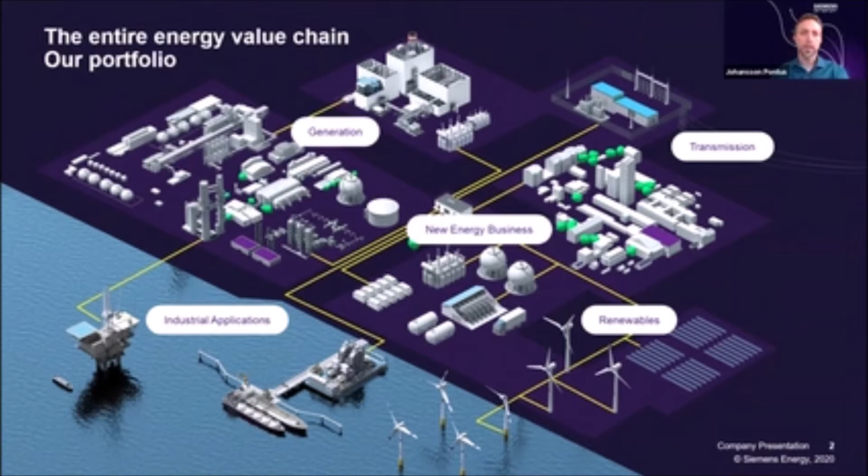Within this company, Siemens Energy, I'm a senior key expert on additive manufacturing, and have a background in industrial engineering and operations management. I worked across a few different countries through the last 25 years in industry, and got into AM back in 2014 when I got the amazing challenge and task to design and build our first additive manufacturing workshop here in Finspång in Sweden for Siemens at the time. That was amazing - it's of course still running, one of the backbones of our additive journey currently.

My role now is to see how we industrialize this technology and make it work in a larger context, with more components, more types of technologies, and to see how this technology is impacting our value chain and our manufacturing setup with all it entails. Hopefully I'll get into some of those details as we progress here.

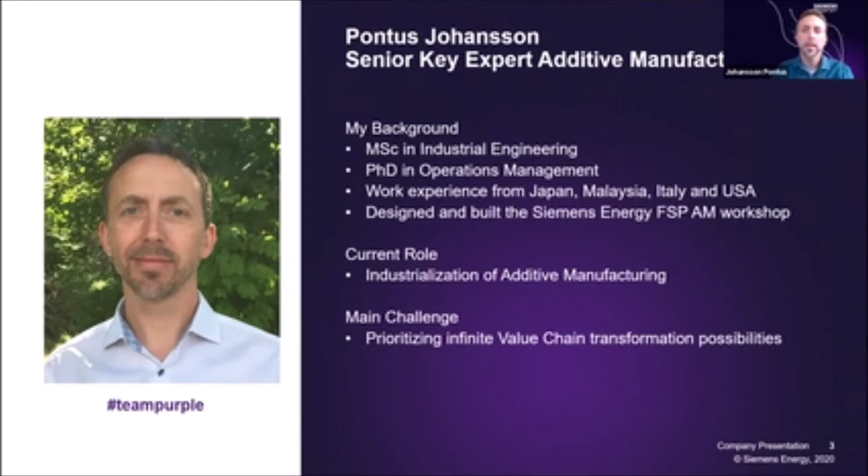Looking at a jet engine, it's a very complex, high-tech product, and so are our gas turbines. Additive manufacturing gives us a possibility to improve the combustion system, the turbine where you actually generate the power, the compressor where you set up the air pressure to be combustible. All of these are highly complex geometries in very advanced materials, where we see additive technology as being a key driver to making these components better.

Better for us means they will live longer, so be more sustainable. They could have higher efficiency, so they would provide a better value proposition to our customers. Or it's just a general life cycle improvement in how these products live their life cycle.

When we talk life cycle, it's not an Apple iPhone or other brand phone with a few years of life cycle. These are intended to work for 15, 25, up to 50 years, preferably without too much interruption in operation. Meaning we have components the size of a fist weighing about 1 kilogram that each generate the same power as a Formula One engine at full throttle. And that little component has to continuously operate 24 hours per day for 4 years, without failure. So it is high-tech stuff we're working on, and where we are applying additive technologies to make these components better.

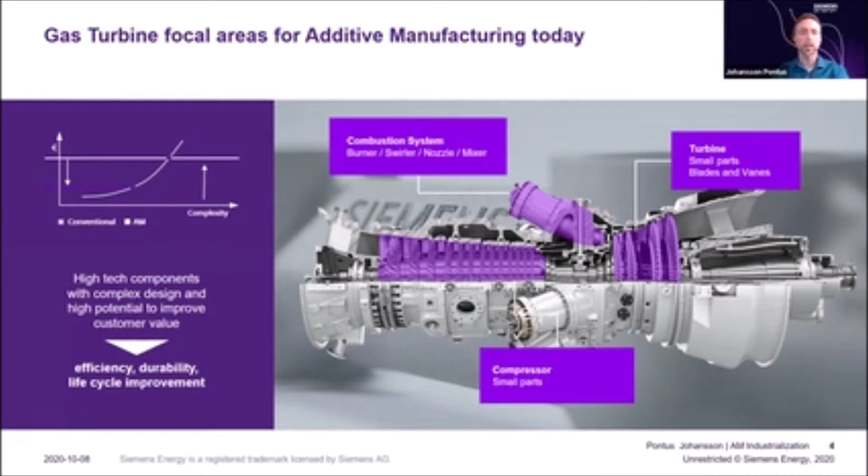That's almost it. In this turbine, combustion of fuel is critical. I think what we see on the screen is actually an example of where additive manufacturing is a key game changer for us.

In energy, conventionally, you can hear about - we as the human race, we burn coal, we burn oil, we burn natural gas. In my basement, I could burn wood I chop myself from my backyard. But basically, to generate energy that can be used as electricity, a lot of it is based off combustion.

What we are now capable of doing with additive technology is create combustion systems that burn hydrogen, meaning there are solutions in place for a carbon dioxide free emission solution in energy. Additive technology isn't the only solution, of course, to creating hydrogen as a fuel. We need electrolysis, solar energy, or wind energy to create hydrogen. But having hydrogen means we can store a carbon dioxide free fuel and use it to create electric energy when we actually need it. So for us this is one of the game changers, and one of the things we're very proud of.

We have a company in Brazil that has procured a turbine setup from us, initially set up to run on 60% hydrogen, meaning a huge cut in carbon dioxide emissions. This for us is a core part of the future energy solution for the world. It's not something that's going to happen overnight, absolutely not. But that type of fuel changeover, based off additive technologies among other things, is to us a core future technology direction.

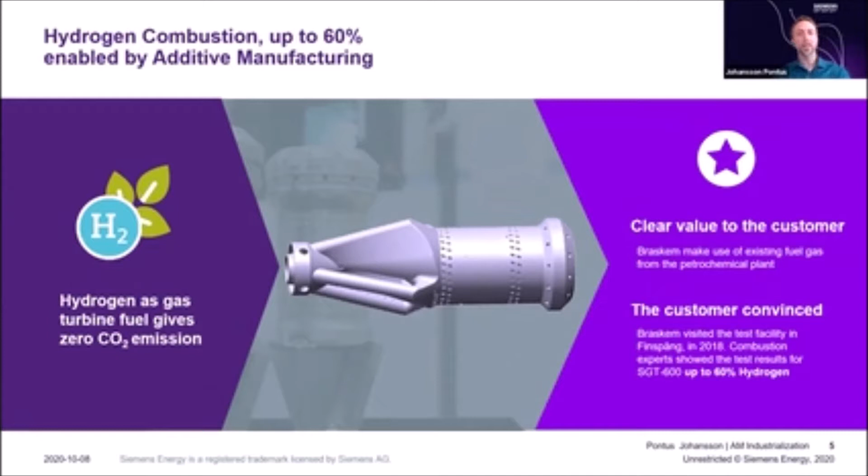This is really a leading star in that journey. To get there, having been able to make that hydrogen combustion solution and getting the first component out there for customer use, it's not something that happened overnight.

Going forward, in 2016 we inaugurated our first really industrial workshop, built here in Finspång, Sweden.

We've been working with additive technologies for a long time and on a broad range. So in 2017, Siemens decided to invest in Markforged, which is, I guess, one of the reasons I'm here today, Mick. Having seen the potential of the company and the technology, we figured this is something where we want to see more. A year ago, we set up a print hub here in Finspång as well.

This print hub was based not just on metal parts, because there's a difference, right? In our end components, we use metal. Back in '17, Markforged was focused on composites, which of course you can't put in a gas turbine because it would melt or burn away very quickly. But still, there's value for us as a user of additive technologies to understand the range of applications and technologies.

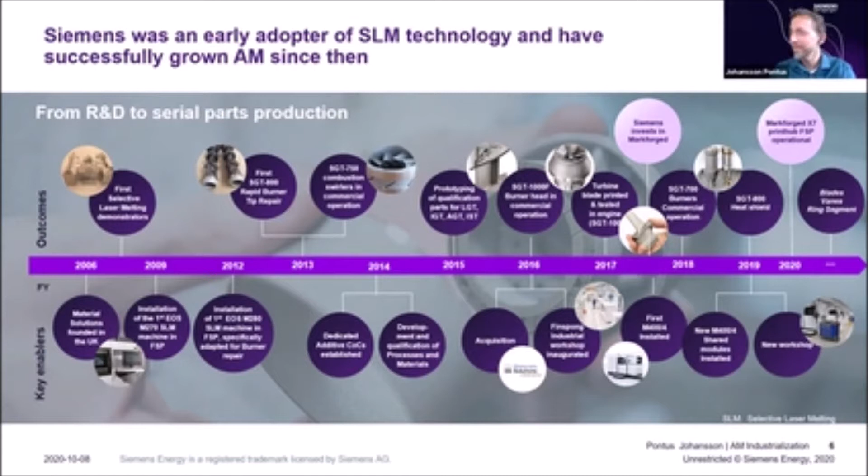With AM, what we see is at minimum two directions that things are changing for us. One is on our products, right? Our products are changing. And I showed you that hydrogen burner before, the combustion system for hydrogen. It just means that we can do something completely different on our products, and we can change weight and materials.

We could scan an existing part that we made and recreate old spare parts. We could change the performance of our components. So the look and performance of our parts will be different. So that's one side - that's the CAD side of things, right?

What can you design? The other is the manufacturing itself. What does additive mean in terms of the changes to our value chain? When you suddenly have a much different possibility around making castings, toolings, fixtures, the speed is different, the pace gets different. You can do very advanced components in very low volumes, for example, with additive technologies, which might be almost impossible if you look at doing an investment casting solution, where you just can't pay for that on a low volume part. So we see two different directions of how the technology is changing us.

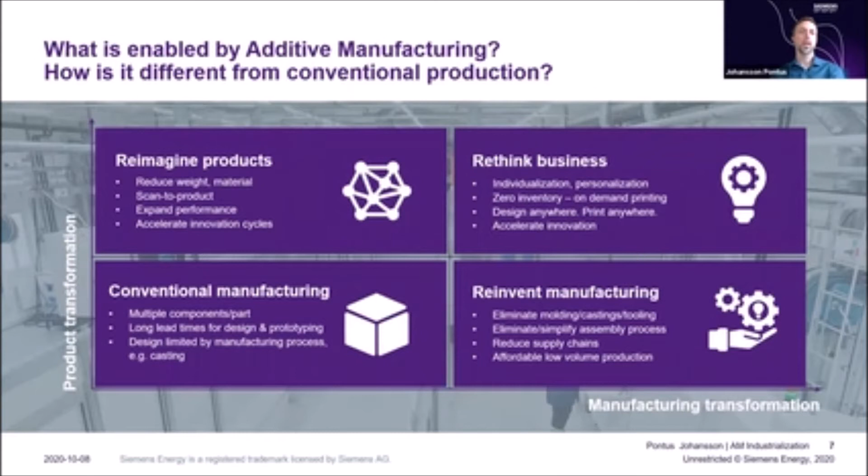It might be familiar to a lot of you guys online and gals. And these parts are here shown being assembled with a bolt through each of them, or a screw actually, into a gearbox. So this gearbox is used to change the rotational speed of approximately 25 megawatts of power.

And we had a customer in South America who needed to have that gearbox realigned. And this little black plastic tools, as they are, they were missing. They are originally a cast iron tool, so heavy chunks of metal that are used to align the shaft of this gearbox to get it up and running again.

And we had an overhaul of this customer site happening in about a week's time. And these tools, which were customer owned, were missing. There were no tools. We had a similar set, but not the right set in our factories here, but we couldn't ship them because we needed them in our factory. And it's just a question, how do we then make this?

So it ended up with us re-engineering a tool that we thought would work. And these Onyx parts we see here are among the most expensive parts we've done, because to make them substitutable to a cast iron part, there's a substantial amount of carbon fiber in these bodies.

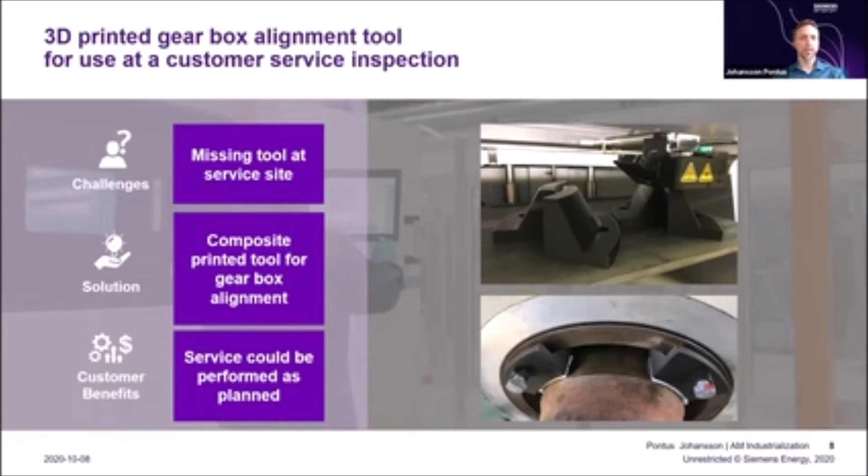Okay, on time, I'm probably about to not fulfill this on target. Again then, just very briefly, right?

I showed you the picture of the hydrogen burner. We used the same picture. Of course, it's not an identical part, but printing this burner, because we have a similar one today made conventionally, just to show what additive does.

When we make this conventionally, basically we weld together 13 metal pieces through 18 different weld operations. We put a thermal barrier coating on top of it, and it has a 26-week lead time to make this part. When you substitute that with a printed version, it's one integrated metal part.

So it's just one article number to keep track of, for example, in your ERP system. It's better from the perspective that it's better cooled. You don't need a thermal barrier coating, and it takes about 3 weeks to make this part.

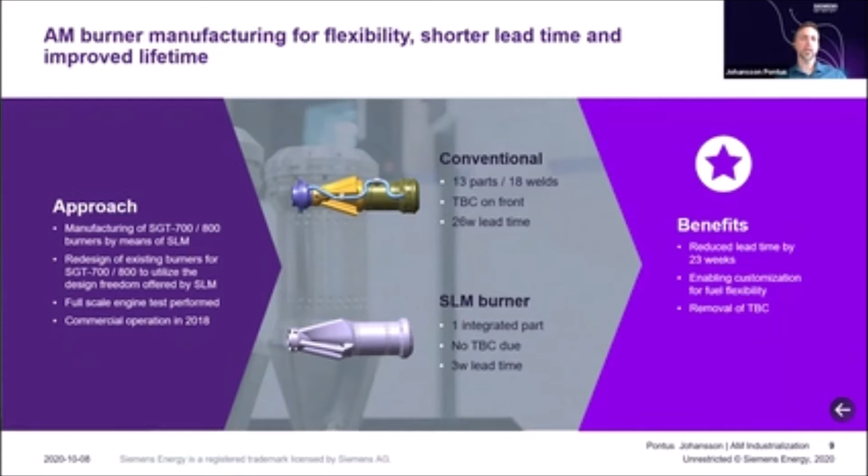Just to show what are we, Siemens and Siemens Energy, doing on AM? Well, yes, we think we are a strong user of additive technology. We do it for our new products. We use it for maintenance and repair and to figure out obsolete parts as shown. We do it, of course, a lot for prototyping and for tooling.

So, looking at the Markforged, we use it a lot on the maintenance side and on the tooling side and prototyping. We don't really use it for new products that go into the hot gas path because, again, the materials are not there yet. That said, seeing the Metal X develop is, of course, interesting to us.

So that's one side of AM, but we are also, we think, a user of AM. So when it comes to this digital end-to-end chain, how do you set up a design tool? How do you monitor your printing processes? How do you set up a cloud-based solution? How do you create a manufacturing platform that works across, because we're a big company, we have different sites, different areas of working. So we need to connect all of this through Teamcenter or some other solution.

Of course, with Siemens, I've used Teamcenter in mind, where there are other brands providing similar information sharing solutions. But understanding and using all of these software and automation tools in the additive environment is for us also a critical changer to how we apply additive technologies.

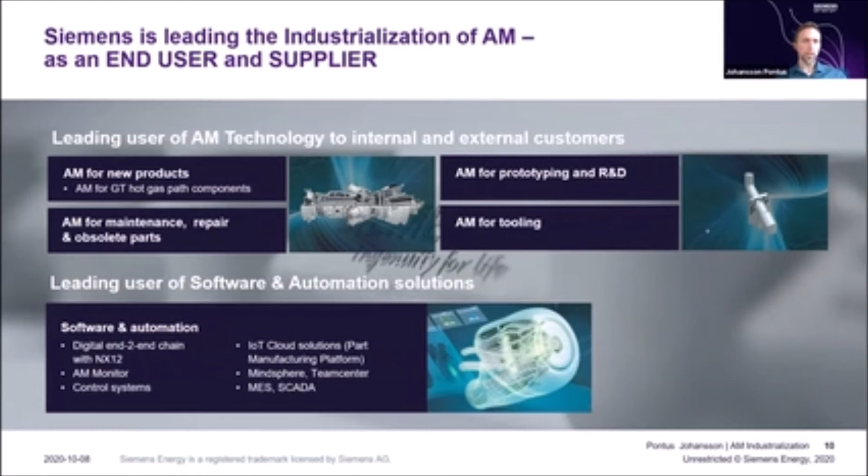Trying to keep times. Footprint, so where are we? What do we actually do with additive?

I said we have a long history, different technologies, but where are we in the world? I'm up here in Scandinavia, Finspång, where we have more than 5,000 square meters of basically printing factory space, with a fair amount of printers. What we see on this slide is EOS M290 printers, but there are other brands and sizes as well.

That's one of our major hubs. Another major hub for Siemens Energy is the one in Worcester, England, shown in this picture, a new building where we're focusing very much on supporting external demand. So if there's any need for making advanced metal components from powder bed, that's the place to go.

When we look at Markforged hubs, that's Finspång. We also have a growing hub of Markforged printers in Orlando, in an innovation center. I guess if someone tunes into Markforged webcasts next week, there will be a discussion with Cliff from our Orlando team, telling a bit about how we use additive there and what's happening on that side of the Atlantic. Since additive is a core technology for us in the future, we also have development centers in other areas.

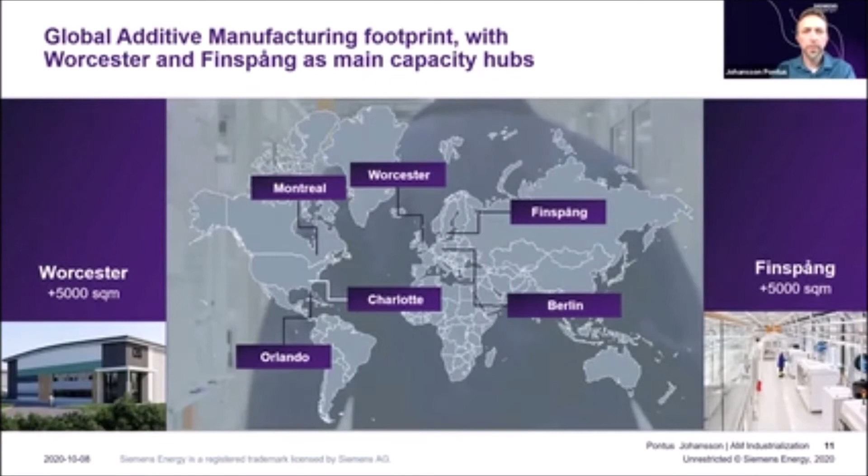Trying to move on and keep my times reasonable. This is a generic slide showing some examples of what we do with composites.

I showed you this unique tooling. What we also find really useful is fixturing, because we're printing more and more for our engine components, and additive means we can create amazing geometries. But the challenge with an amazing geometry is when you need to machine it - there's no way to clamp it or grip it, which means we need very advanced fixturing solutions. Here we have a great benefit with Markforged printers, where we can make a strong, solid fixture with Onyx or reinforced Onyx, for example. That serves a great purpose in speeding up the post-processing of anything we print on the metal side. This goes back to the changes in the value chain - it's not about changing the product.

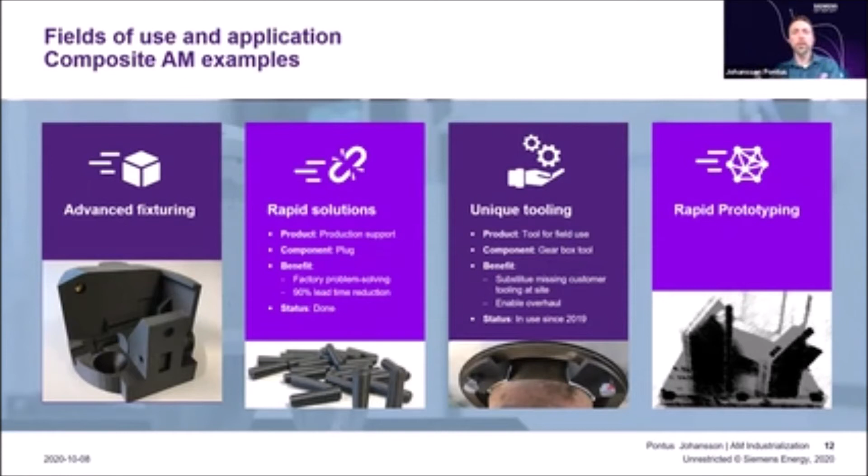This is about the value chain. How do we actually get an advanced metal printed geometry through post-processing, through the value chain of how do you clamp it, how do you polish it, how do you do all the things you need to have an engine-ready component? Because basically nothing that comes directly off the printer is end-use ready.

There's always some type of post-processing, polishing, machining, heat treatment, something that needs to happen. So composite for us, advanced fixturing is very important. Rapid solutions, right? Whatever we want to.

Here's just a number of plugs that has a hole through it, something we needed at a phase in our production. How do we get these tubes into production quickly? Do we try to drill metal piping? No, the quick and easy and efficient solution is to print this. It looks like a basic component, but it has to be at a specific inner and outer diameter.

Printing has advantages occasionally, and rapid prototyping. If we need to quickly do an assembly mock-up and can't wait 9 months to have the metal part finalized, could we do the assembly mock-up with a printed onyx part? Yeah, we probably could. We have done. And this picture is blurred because I don't want to show you what's actually on that picture, to be honest.

But yes, so composite serves a range of purposes for us, all good, all in this realm of changing our value chain setup.

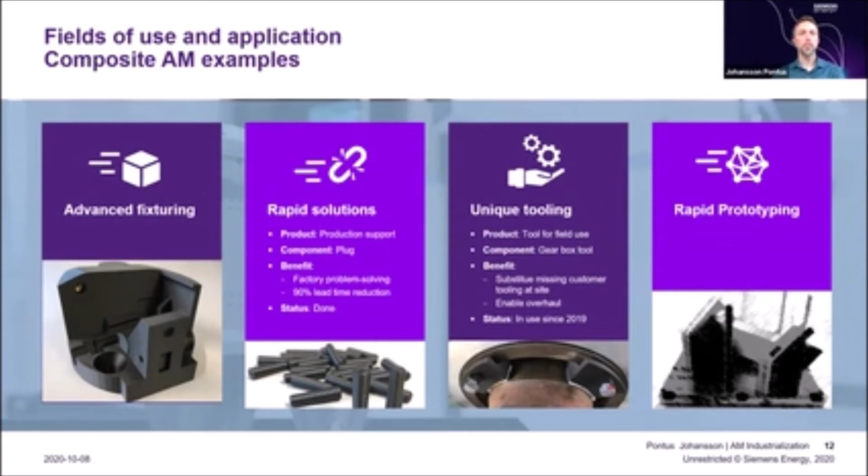I'm trying to show this because this is really what we're trying to do. We're trying to be outstanding in the field of additive manufacturing and have a unique selling proposition, whether for our own components or for helping other companies, which we realize we can do more and more. So we have the references in terms of getting parts that actually work and live in very advanced industrial operation.

We have the capability around alloys. We have patents. We have solutions that are at the efficiency frontier of what additive can do. We are quality certified, and we try to offer complete solutions, whether to our customers who need additive help or someone else. We have a great understanding that we're happy to share with others, as long as it's not a competitor coming to us, we'll be happy to discuss this. Because for us, that's a way of advancing our knowledge as well.

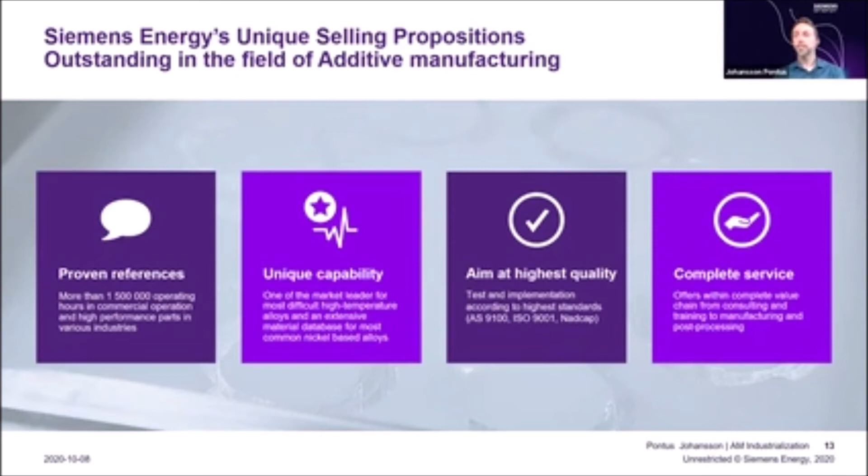Being challenged on what can be done with additive means that we get better at it. We believe this is a technology that we have to master for the future, because it will only be more and more relevant to our survival. And now I'll try to be quiet for a few seconds, Mick.